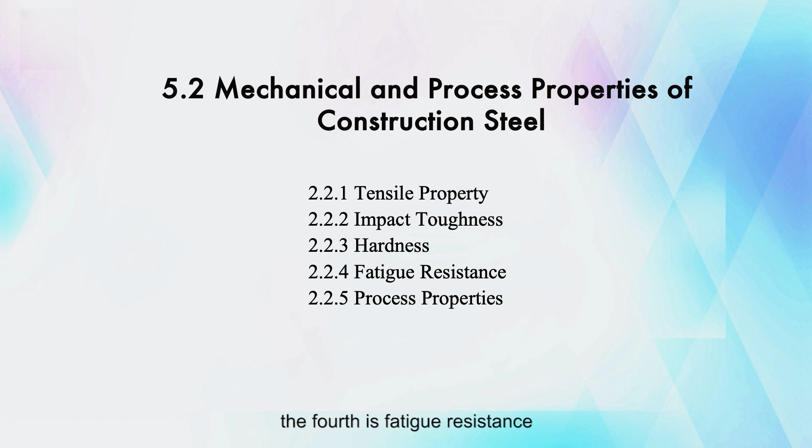Hello students, we're now beginning to study the mechanics and processing of steel materials, focusing primarily on 5 aspects. The first aspect is the tensile strength of steel materials. The second is the impact toughness of steel materials. The third is hardness. The fourth is fatigue resistance, and the final one is the processing performance of steel materials.

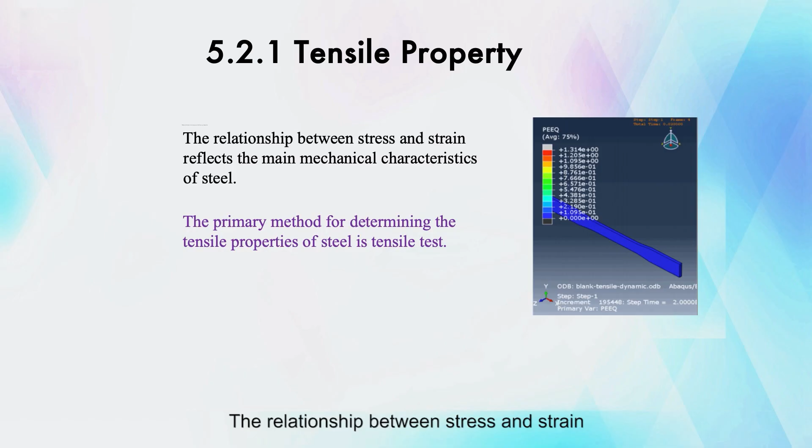The tensile strength of steel materials is its primary performance and is extremely important in our current reinforced concrete structures and other constructions. When steel materials are subjected to tension, they not only generate stress but also produce corresponding strain. The relationship between stress and strain reflects the fundamental mechanical characteristic, often referred to as Hooke's law. The primary method for determining the tensile strength of steel materials is our tensile testing experiment.

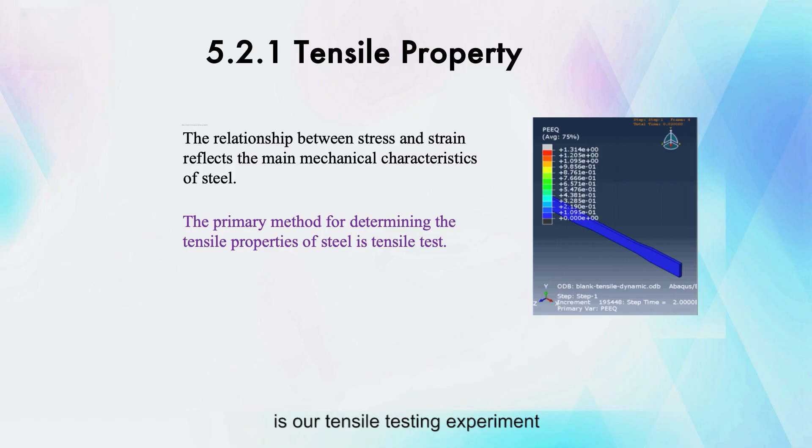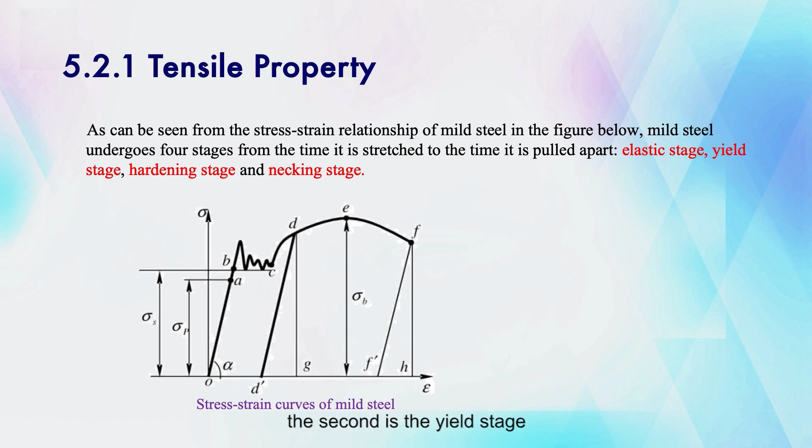The following figure shows the stress-strain relationship of mild steel. Mild steel, from being pulled until it breaks, experiences 4 main stages. The first is the elastic stage, the second is the yield stage, the third is the strengthening stage. Mild steel, from tension to fracture, goes through 4 stages with different performance characteristics, and in structural design some of the required performance indicators are very much related to the tensile steel bar.

First of all, in the elastic stage, stress and strain are proportional, and on unloading the specimen is restored to its original state, manifested as elastic deformation. The yield stage is characterized by the rate of strain increase being greater than the rate of stress growth. Stress and strain are no longer proportional, leading to the initiation of plastic deformation. In the strengthening stage, when the load passes the yield point, changes occur in the internal structure of the specimen, which results in an improved resistance to deformation.

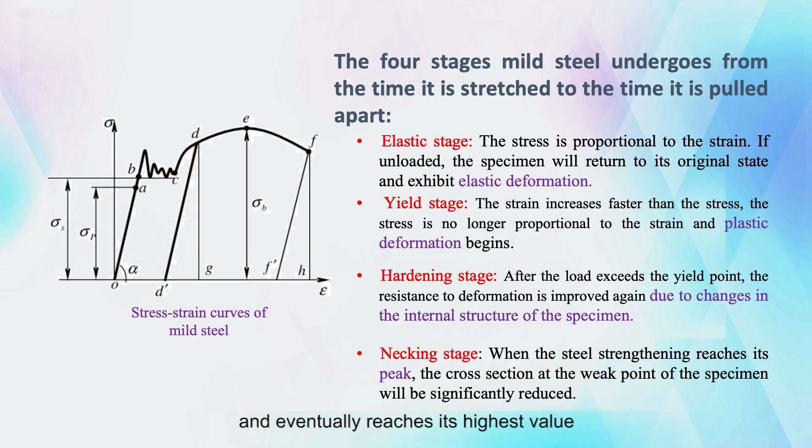The final stage is the necking stage, where after reaching the peak of strengthening, the cross-sectional area at the weakest point significantly reduces and then fracture occurs. Throughout the entire process of stretching the steel bar, you can observe changes in stress. It undergoes an initial increase, followed by a decrease, and eventually reaches its highest value. Then we hear a boom and the steel rebar breaks.

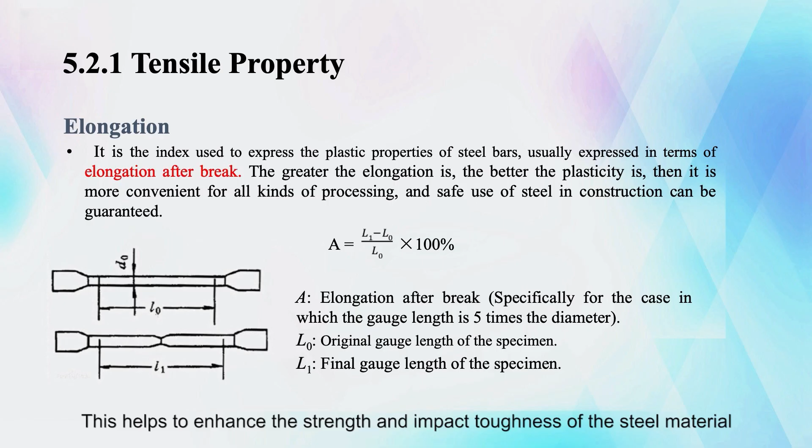Tensile properties also include the plasticity of the steel bar, used to express the plastic properties of the steel bar. We typically use the elongation at break, usually referred to as the percentage of elongation at break, to indicate plasticity. The greater the elongation at break, the better the plasticity, making it easier for various types of steel to be processed and ensuring the safe use of steel in construction. In many cases, especially with ordinary carbon steel, we perform cold drawing in engineering projects. This helps to enhance the strength of steel material.

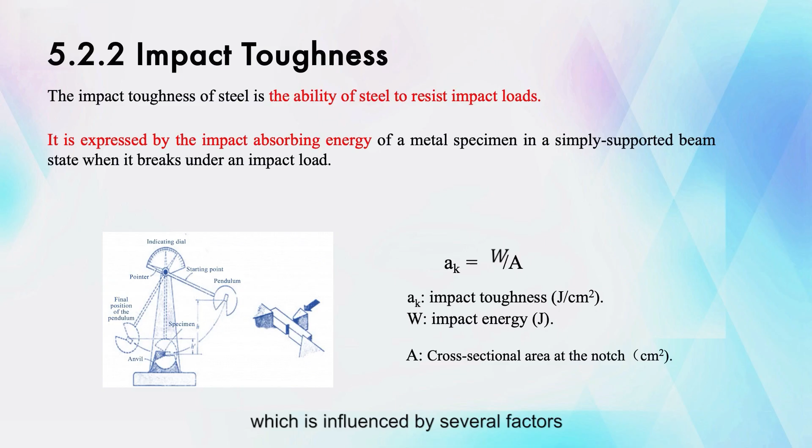The impact toughness of steel materials refers to their ability to resist impact loads. It is measured by the energy absorption during fracture under impact loads, often expressed as the absorbed energy in the notch condition. We use the term impact toughness as an indicator of this property, which is influenced by several factors. The first aspect to consider is the chemical composition of steel. When steel contains higher levels of harmful elements such as phosphorus and sulfur, its impact toughness decreases. Its quality during smelting also matters: for instance, incomplete deoxidation can lead to segregation, resulting in reduced impact toughness. Additionally, cold working and aging processes can also slightly diminish the impact toughness of steel.

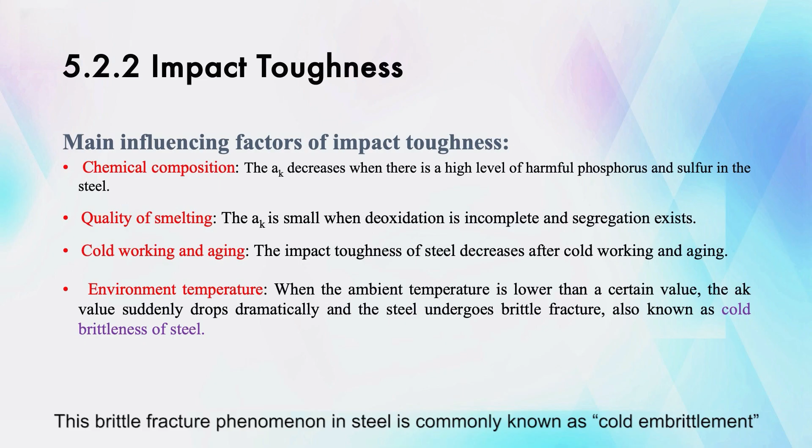Environmental factors, particularly temperature, play a significant role in this regard. When the ambient temperature drops below a certain threshold, steel's toughness experiences a substantial decline. This brittle fracture phenomenon in steel is commonly known as cold embrittlement.

The third aspect concerns hardness, which measures a material's ability to resist localized deformation when subjected to pressure from a hard object. Depending on the testing method and range, hardness can be categorized as Brinell hardness, Rockwell hardness, Vickers hardness, Shore hardness, micro hardness, and high-temperature hardness. In construction steel, Brinell hardness (HB) is typically employed as one of the testing methods.

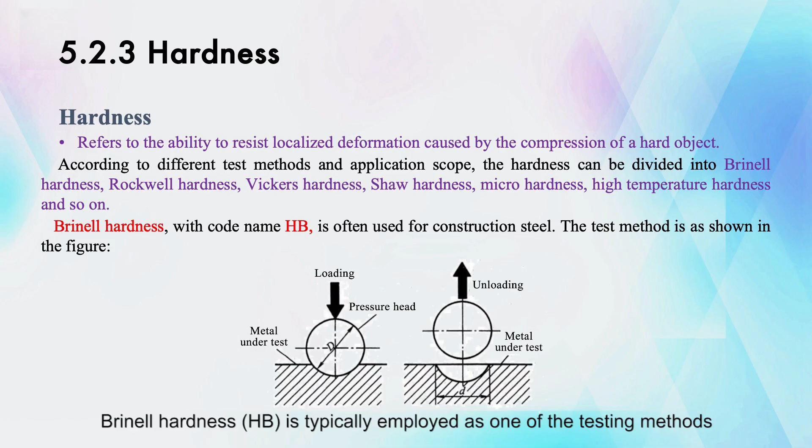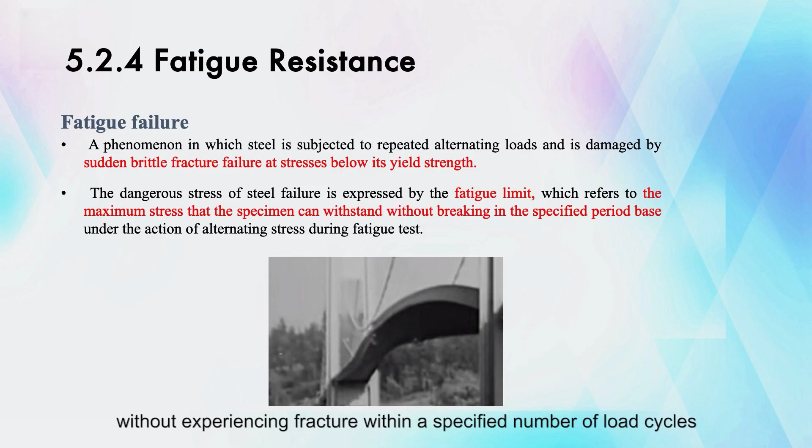The fourth aspect relates to fatigue resistance. Fatigue damage is a phenomenon observed in engineering structures where steel can undergo sudden brittle fractures when subjected to repeated alternating loads, even though the stress remains below its yield strength. This type of damage is referred to as fatigue damage. The critical stress level for steel damage is expressed as the fatigue limit, determined through fatigue testing. It represents the maximum stress a specimen can withstand without experiencing fracture within a specified number of load cycles.